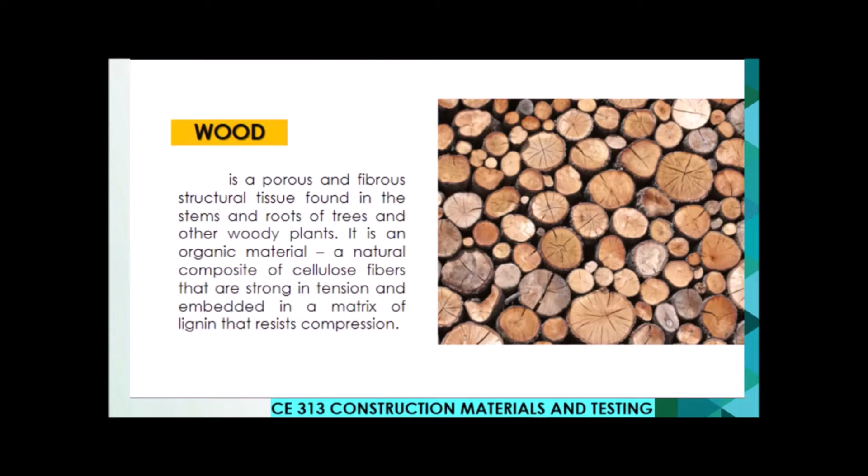So, para ma-visualize natin siya, dito class we have a figure. Ibig sabihin yung cellulose ay dito sa loob, okay? Yung lignin naman, itong outer part na to.

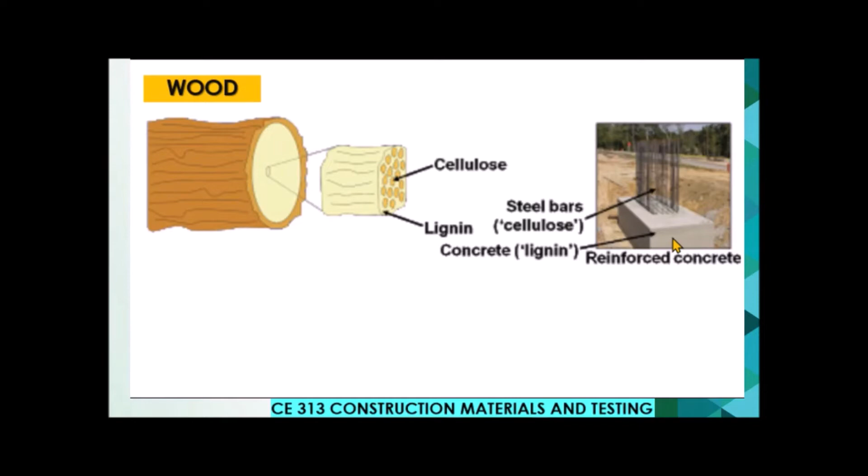So, para mas madali pa nating maintindihan, i-compare natin siya dito sa isang reinforced concrete. Ibig sabihin lang, class, yung ating cellulose, siya yung nagsisilbing steel bars, kung saan siya ay good for tension. Ngayon naman, itong lignin, siya naman yung concrete dito sa ating reinforced concrete, which is good naman sa compression.

Wood is one of the oldest known materials of construction, and skill in its use combined with the understanding of its nature have together produced many satisfactory solutions for structural and design problems throughout the ages.

So, alam naman natin, class, na noong unang panahon, wood lang yung ginagamit natin madalas sa construction. Kaya nga makikita natin noong unang panahon, made of wood lang yung kadalasang mga bahay.

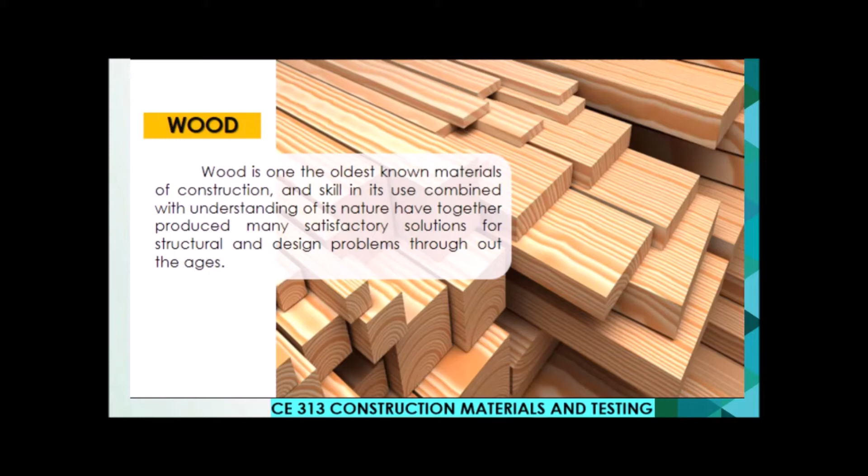In addition to its usefulness as a material for structural and applied design, because of its relative cheapness, wood has also fulfilled a role capacity of temporary structure, allowing materials such as concrete to be erected in structural forms, which would otherwise have been vulnerable in the stage before the binding medium gained strength.

So, ibig sabihin lang, class, nung temporary structure, tinatawag din natin yun na falsework. Yung falsework consists of temporary structure used in construction to support a permanent structure until its construction is sufficiently advanced to support itself.

So, siya natin, class, madalas nagagamit pag sinabing falsework. Siya yung mga pansuporta, halimbawa natin sa second floor, sa mga arcs, ganon.

At ang isa pang gamit nga ng wood is bilang forma. Ngayon kasi, class, meron na tayong mga steel tubes na ginagamit sa falsework. Pero kahit papano ngayon, may gumagamit pa rin, of course, ng wood.

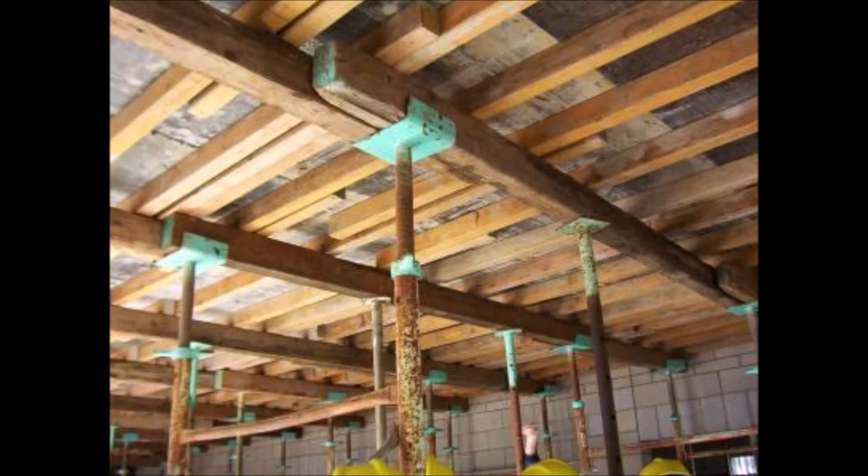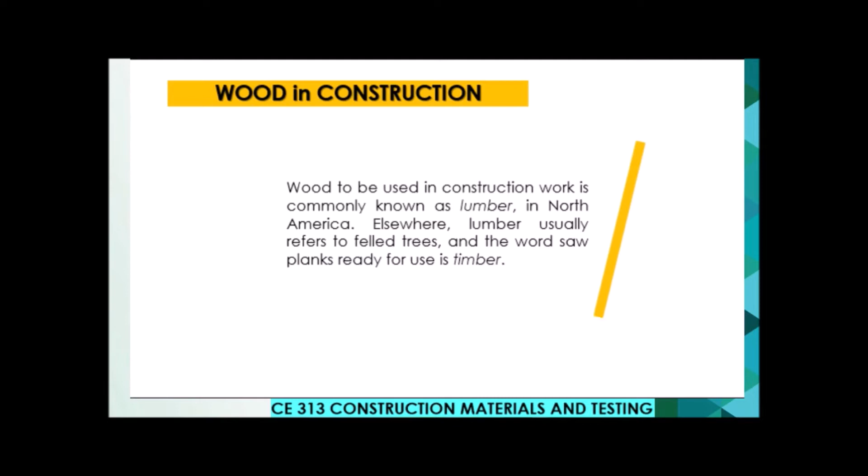So, wood in construction. Wood to be used in construction work is commonly known as lumber, in North America. Pero dito din naman sa ating class, alam din naman natin na basta sa construction, lumber. Kaya nga, di ba pag bumibili tayo, coco lumber, good lumber.

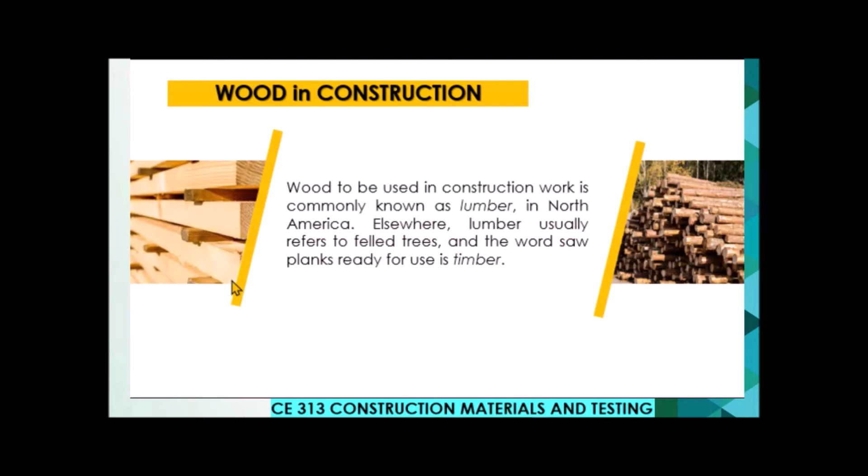Pinutol na puno. And the word for saw planks, ready for use, is timber. So, ito yung saw planks, ang tawag dyan is timber. So, pag nag-prepare kayo, timber lang pala. Hindi ko sure, pero meron kasing subject na timber design.

So, wood has been an important construction material since humans began building shelters and houses. Kagaya nga na sabi ko kanina, noong unang panahon, kadalasan lang din naman ng mga bahay is made out of wood. At sa ngayon, kahit medyo modern na tayo sa ating mga construction materials, meron naman tayong tinatawag na sustainable living, kung saan mas ginagamit pa rin nila talaga yung wood.

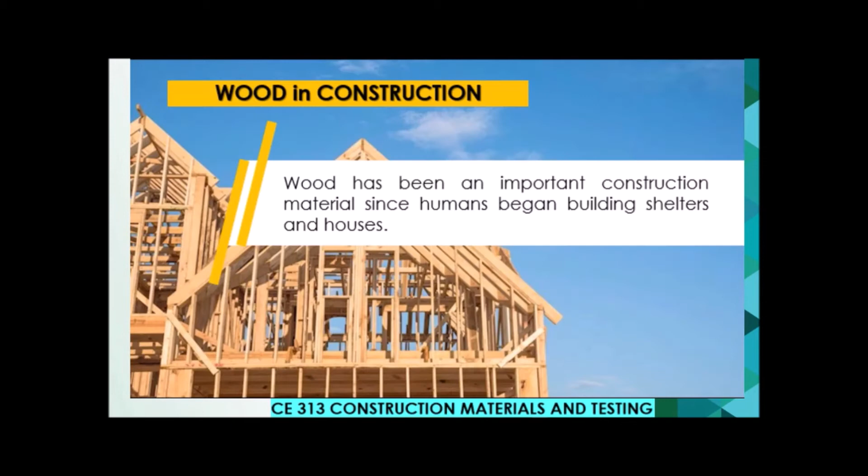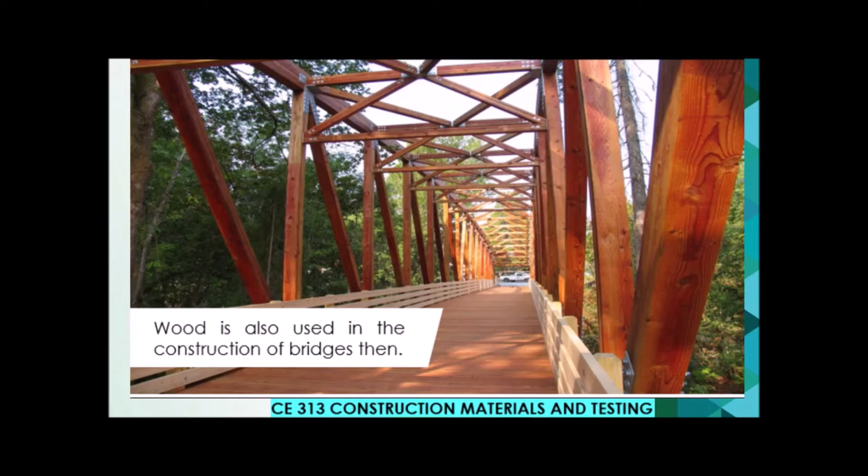And of course, sa panahon natin ngayon, nililimit din naman natin yung pagpuputol ng puno. Kaya mas madalas ginagamit na natin yung mga steel. Pero yung strength, na i-design din yan class. Kaya po pwede talagang gamitin yung wood for bridges.

Seasoning of wood. Seasoning is the process of drying timber to remove the bound moisture contained in the walls of the wood cells to produce seasoned timber. Seasoning can be achieved in a number of ways.

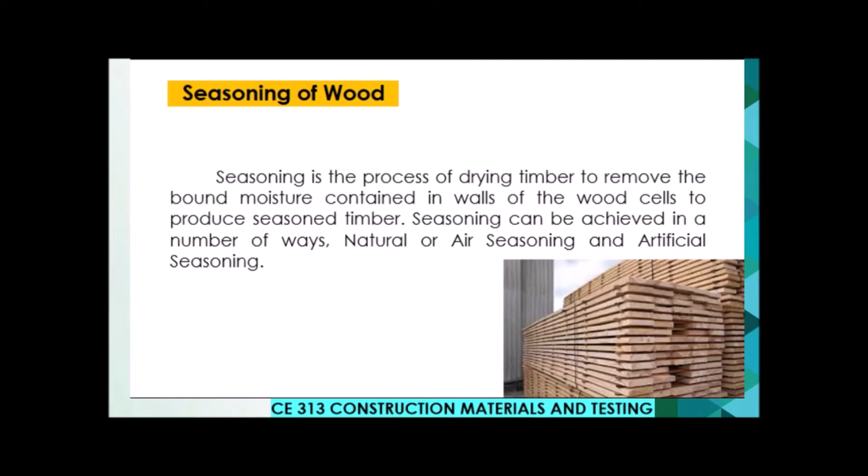So as we said, there are two ways to season wood: natural or air seasoning, and artificial seasoning.

So what is natural or air seasoning? Air seasoning is considered one of the best methods adopted in seasoning of lumber, although the period involved is relatively longer than the artificial seasoning method.

So how is natural or air seasoning done? Lumber is piled outdoor where its length is sloped at about 10% of its length. Lumber is piled in a well-ventilated shed. Each piece is properly and evenly spaced from each other for free circulation of the air around the lumber. The uniform spacing of the lumber between each other in a pile is arranged by using wooden or bamboo sticks inserted between each pieces of lumber.

The stick inserted between each piece of lumber not only serves as a spacer for free air circulation, but also prevents ants, worms, and various insects from living in between the lumber, subjecting the wood to attack.

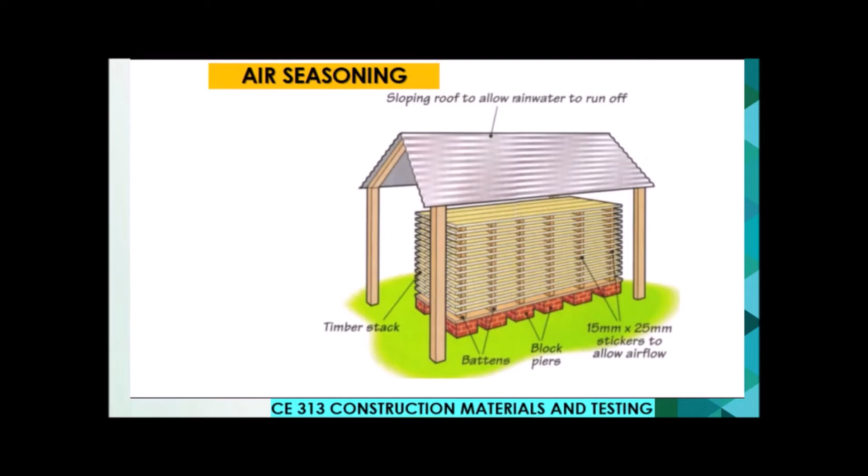Next is our artificial seasoning. Under this method, the lumber is stacked inside a drying kiln and then subjected to steam and hot air under pressure. Artificial seasoning is the process being adopted for quick drying of wood.

So this is faster. But wood which undergoes this process is considered quite inferior in quality as compared to those that are dried by the natural seasoning method.

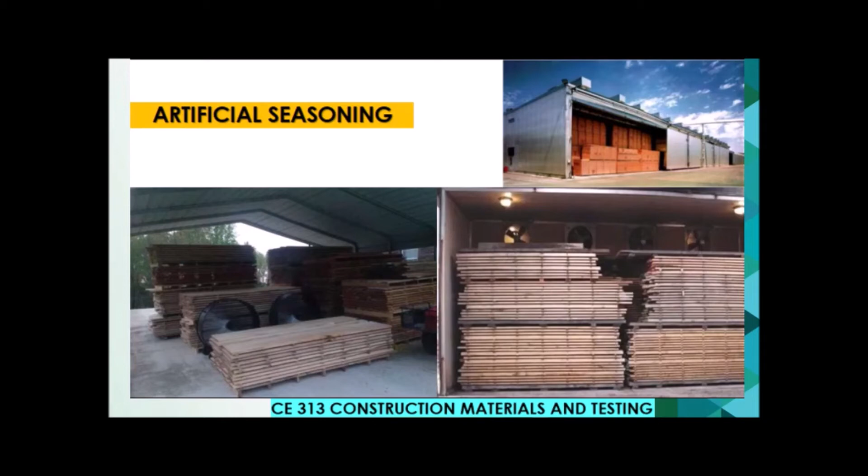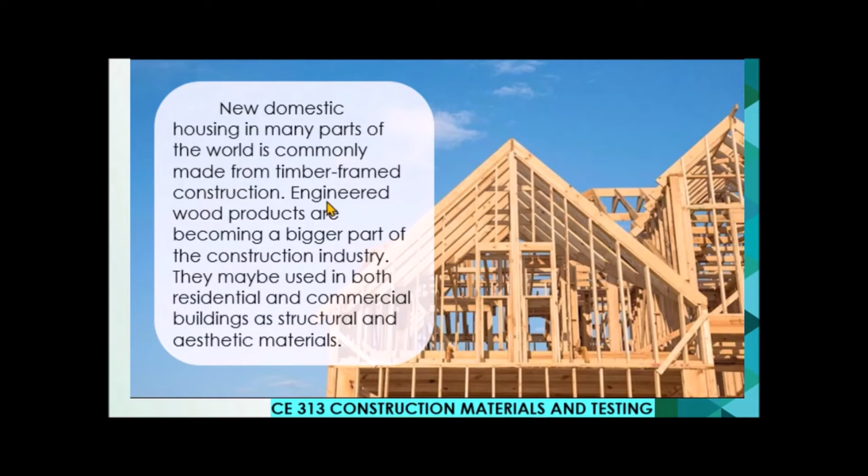New domestic housing in many parts of the world is commonly made from timber frame construction. Engineered wood products are becoming a bigger part of the construction industry. They may be used in both residential and commercial buildings as structural and aesthetic material. So here, we introduce what we call engineered wood.

Engineered wood is manufactured from scraps of lumber and byproducts such as sawdust that have been reformed using heat, glue, and pressure to make a usable solid wood alternative, in an effort to meet the demands for construction materials that are lower costing but equally durable.

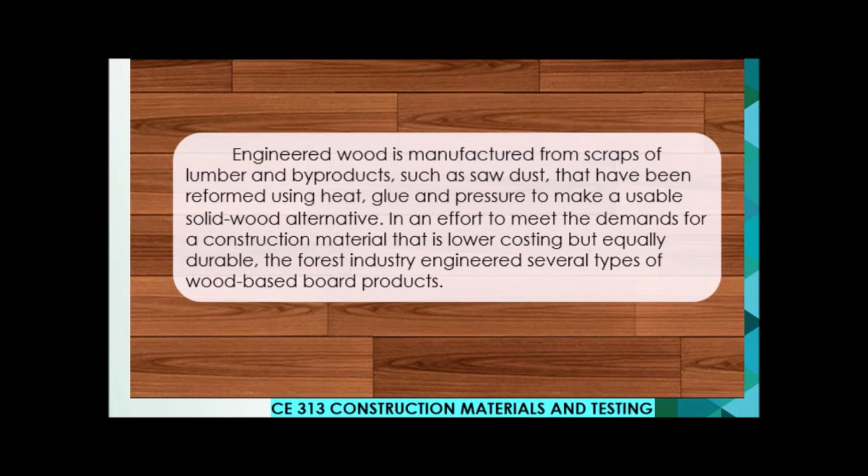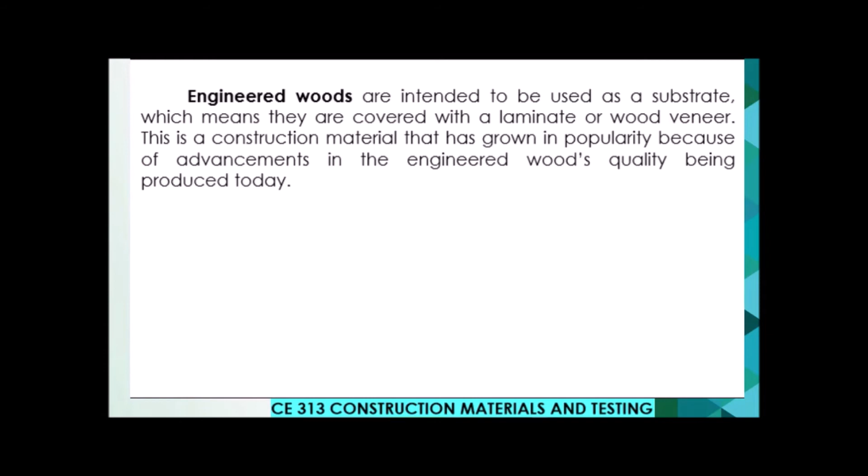Engineered woods are intended to be used as a substrate, which means they are covered with a laminate or wood veneer. This is a construction material that has grown in popularity because of advancements in the quality of engineered woods being produced today.

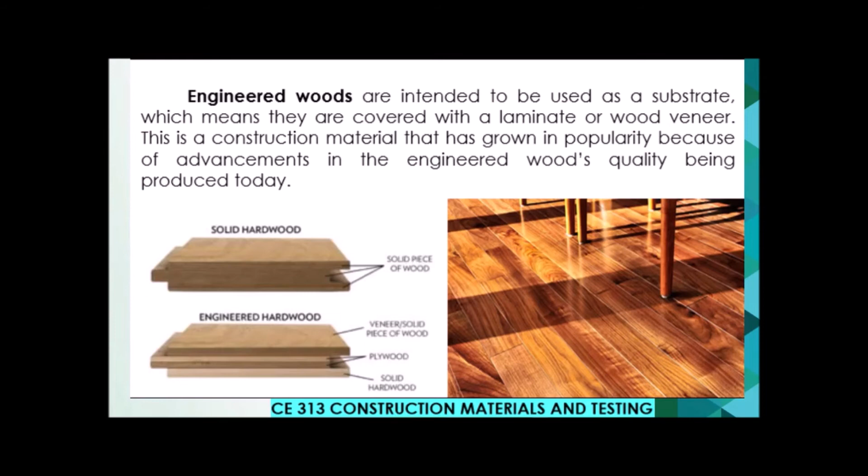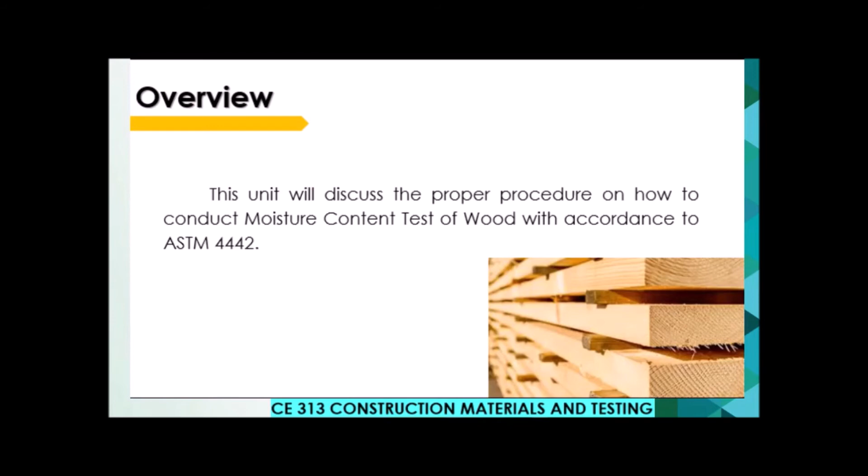Let's have our overview first. This unit will discuss the proper procedure on how to conduct the moisture content test of wood in accordance with ASTM D4442. The test includes testing objectives, scope, apparatus required, safety and precautions for materials, apparatus and equipment to be used, step-by-step test procedure, tabulation of data, calculation, and test results.

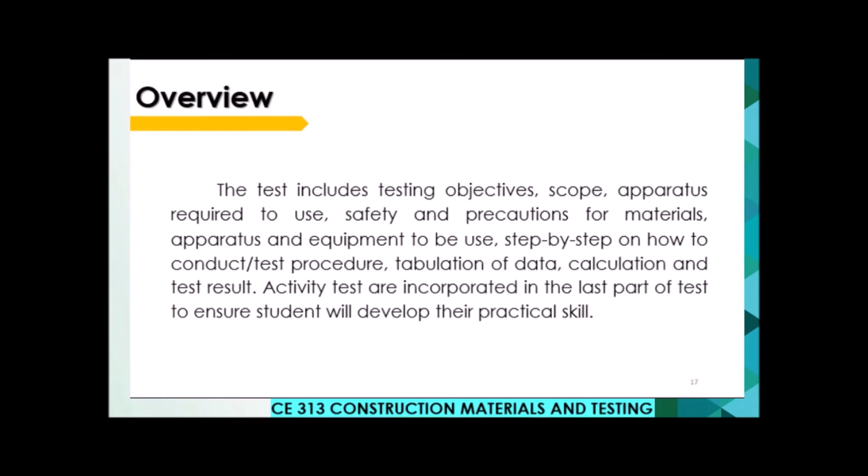Activity tests are incorporated in the last part to ensure students develop their practical skills. So once we finish discussing this, we will have an activity.

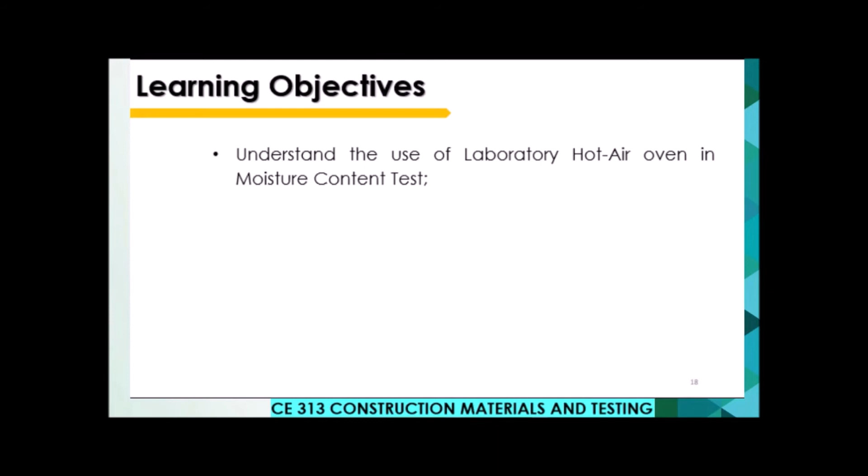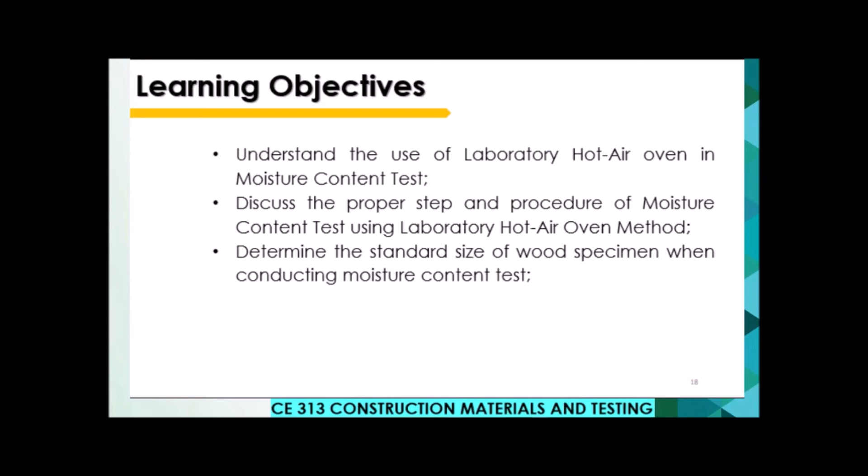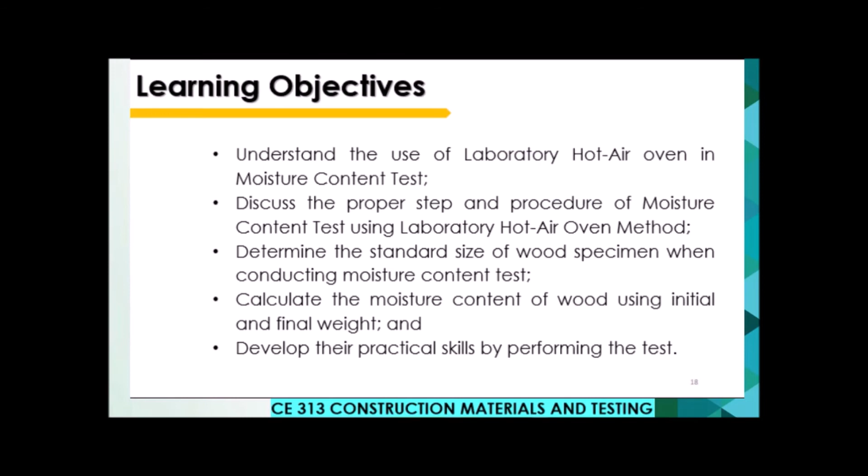What are the learning objectives under this unit? First is to understand the use of the laboratory hot air oven in moisture content testing. Next is to discuss the proper steps and procedure of the moisture content test using the laboratory hot air oven method, and determine the standard size of wood specimen when conducting the test. Next is to calculate the moisture content of wood using initial and final weight. Finally, to develop your practical skills by performing the test.

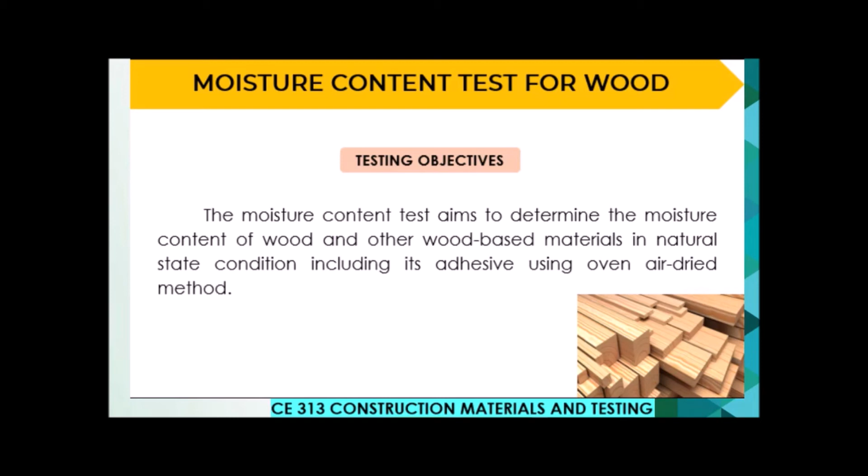So we have here the moisture content test for wood in accordance with ASTM D4442 using a laboratory hot air oven. What is our testing objective? The moisture content test aims to determine the moisture content of wood and other wood-based materials in their natural state condition, including adhesive, using the oven air-dried method.

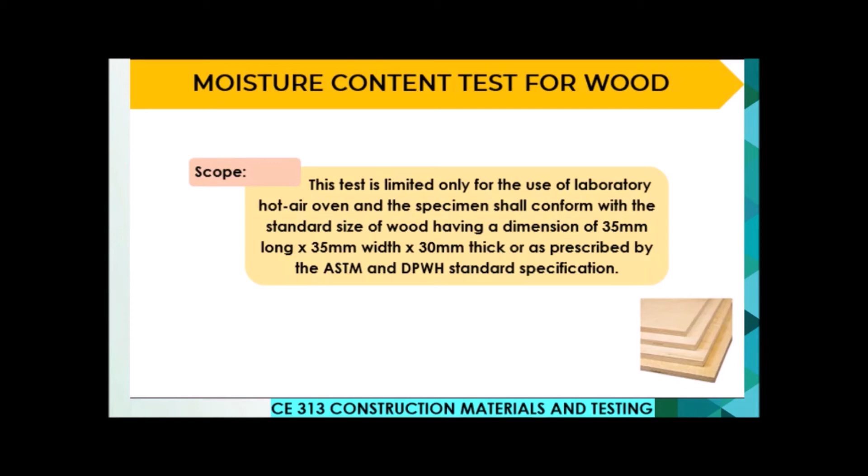What is the scope of this test? This test is limited only to the use of a laboratory hot air oven, and the specimen shall conform to the standard size of wood having a dimension of 35 mm long, 35 mm width, and 30 mm thick, or as prescribed by the ASTM and DPWH standard specification.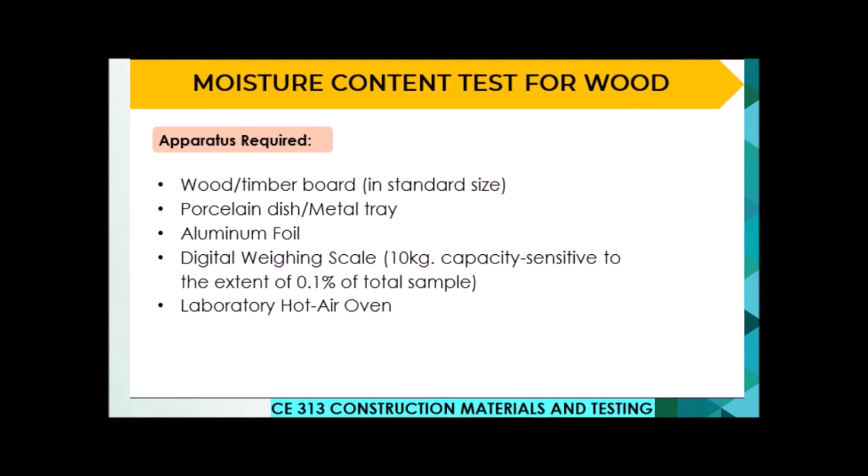What are the apparatus required for this test? First, of course, we need the wood timber board, which should be in the standard size stated earlier. We also need a porcelain dish or metal tray, aluminum foil, a digital weighing scale, and of course, a laboratory hot air oven.

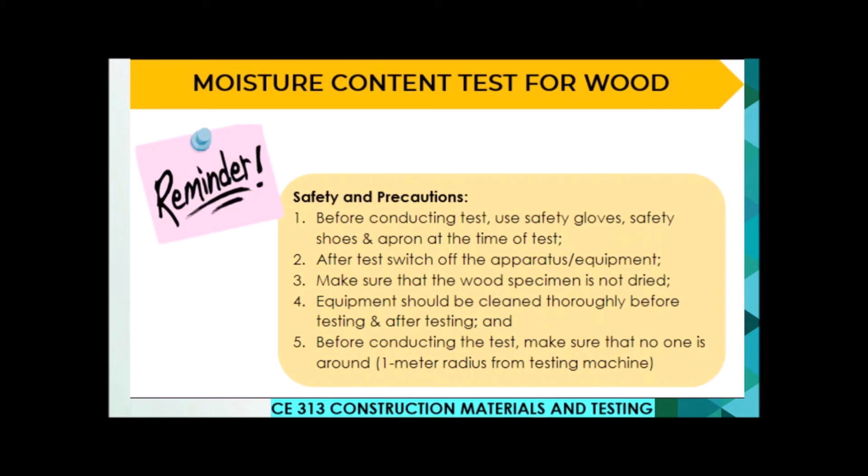Before we conduct the test, let's have some safety and precautions. Before conducting the test, use safety gloves, safety shoes, and an apron during the test. After the test, switch off the apparatus. Make sure the wood specimen is not dried out improperly. Equipment should be cleaned thoroughly before and after testing. Before conducting the test, make sure no one is within a 1 meter radius of the testing machine.

Test procedure: the following procedure was adopted to ensure that the data recorded in the moisture content test specimens was taken in an organized and consistent manner.

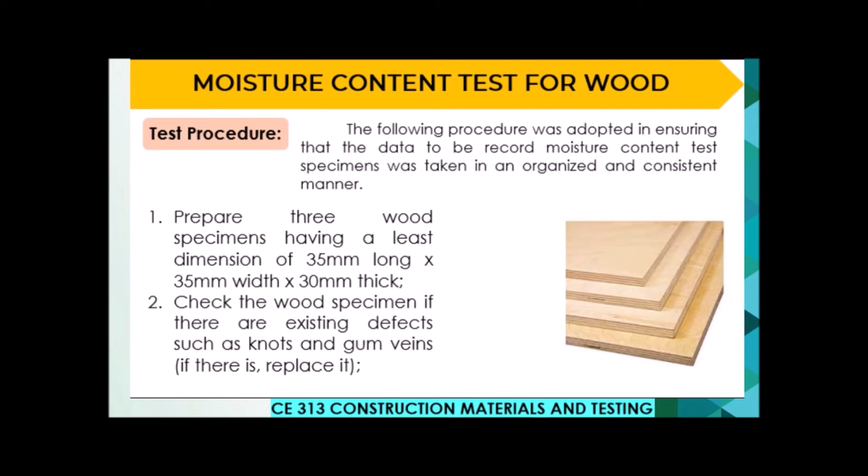First, prepare our specimen with the required size or dimension of 35 mm long, 35 mm width, and 30 mm thickness. Next, check the wood specimen for existing defects such as knots and gum veins. If there are any, replace the specimen. After checking the wood specimen, grab aluminum foil and wrap each wood specimen immediately.

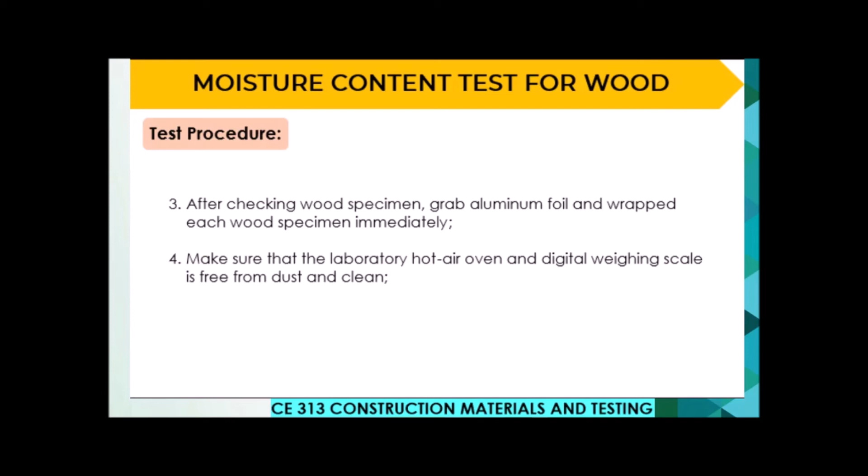Next, make sure that the laboratory hot air oven and digital weighing scale are free from dust and clean.

Get the wood specimen and weigh it individually. If one piece weighs less than 50 grams, cut one, two, or more adjacent test pieces and weigh them together to make sure that the initial weight is more than 50 grams. So the initial weight should be 50 grams.

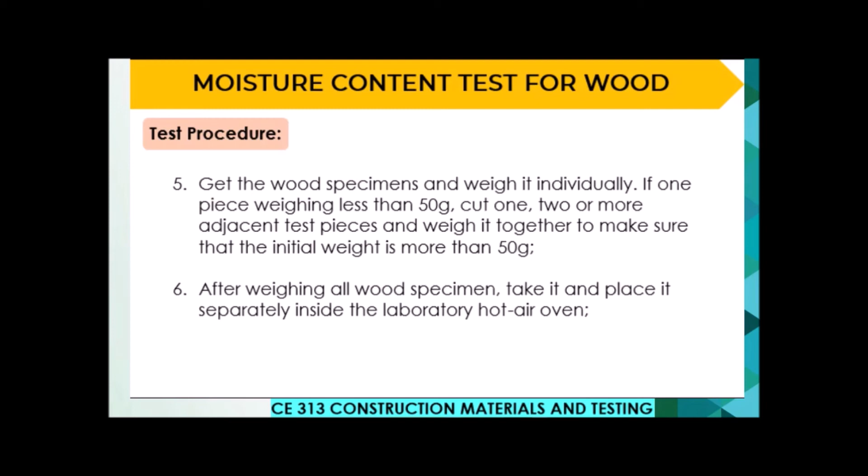After weighing all wood specimens, take them and place them separately inside the laboratory hot air oven. Set up the temperature of the laboratory hot air oven at 110 degrees Celsius plus or minus 5 degrees Celsius for at least 18 hours but not to exceed 24 hours.

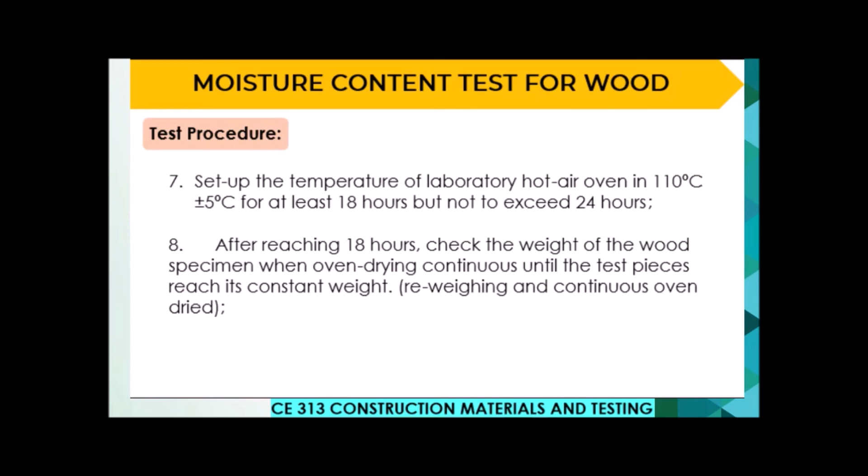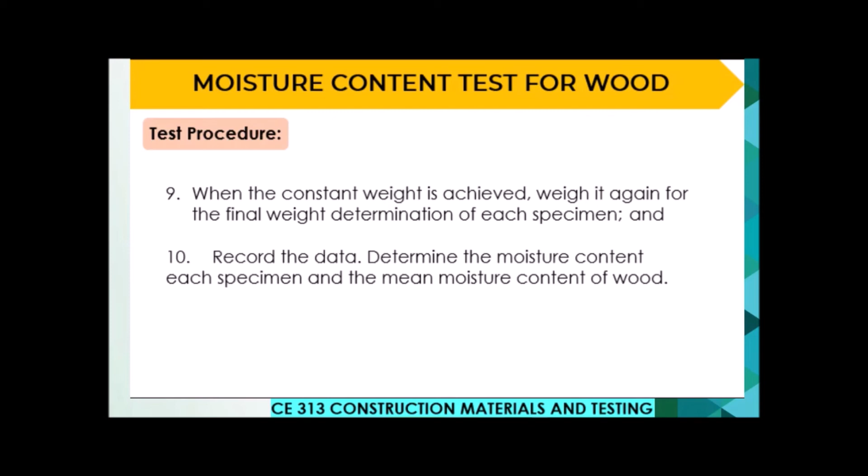So when the constant weight is achieved, weigh it again for the final weight determination of each specimen. And record the data. Determine the moisture content of each specimen and the mean moisture content of the wood.

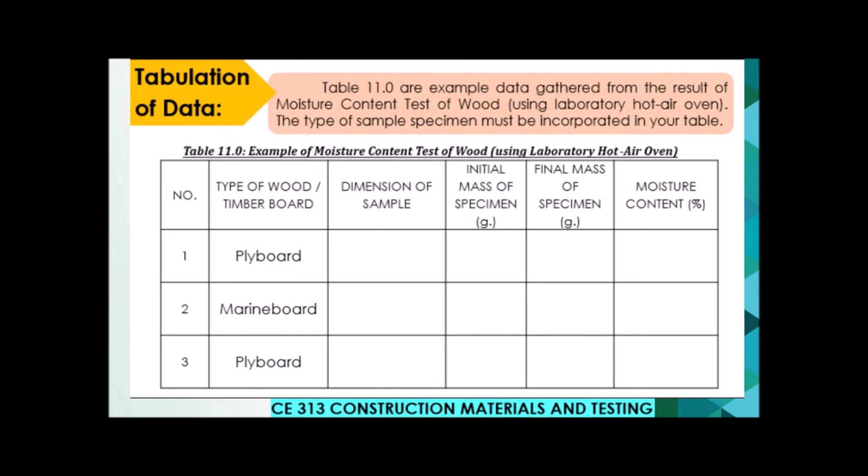And then we compute our moisture content. The dimension of the sample specimen must be incorporated in your table. So here is the dimension of our specimen.

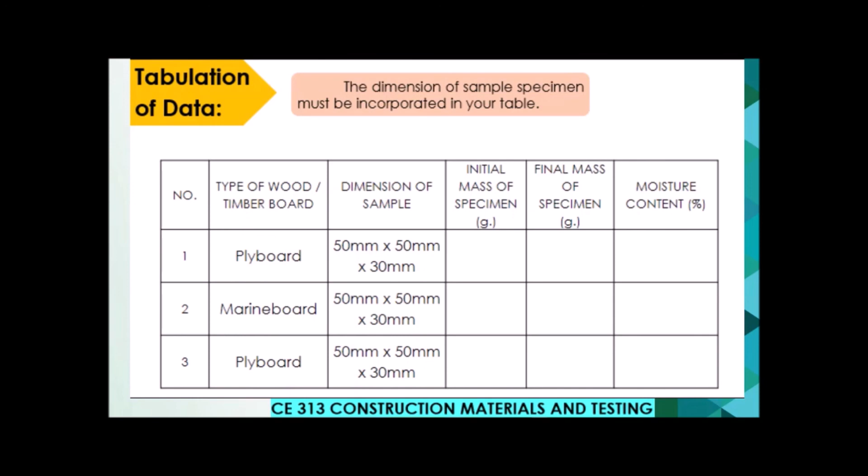Okay, so next, to be able to determine the moisture content of wood, you need to consider the original or initial weight, initial mass of the given sample.

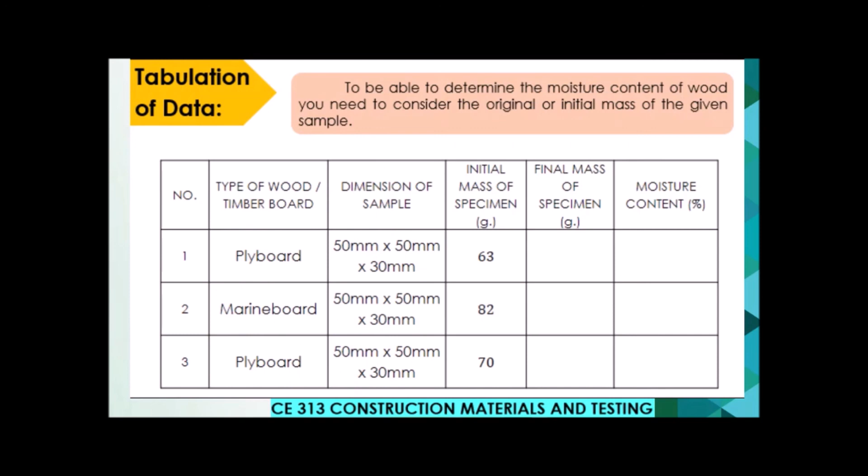Okay, so in addition, we also need the final mass of the given sample. This is the mass after it is placed in the laboratory hot air oven. So for sample number 1, from 63 grams, its final mass became only 57 grams.

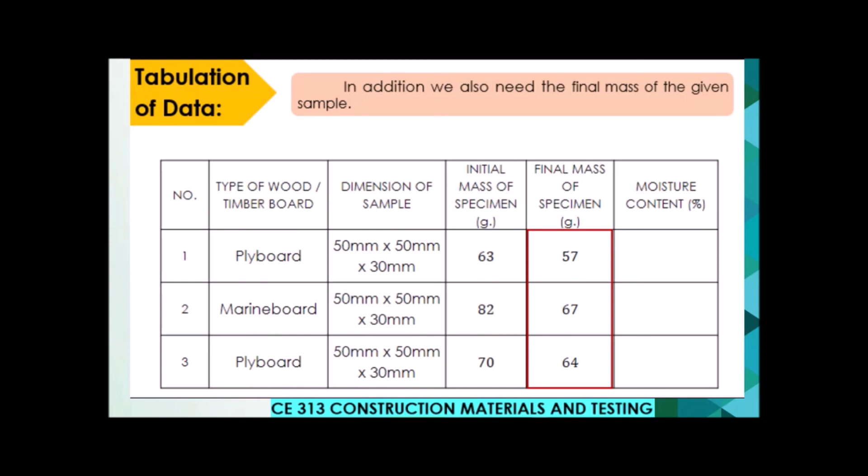For sample number 2, the marine board, from 82 grams, it became only 67 grams. For sample number 3, plyboard, from its mass of 70 grams, it became only 64 grams. So now, let's determine the value of the moisture content of the wood.

So how do we determine the moisture content of wood in percent? It's the initial mass minus the final mass of our specimen, divided by the final mass of the specimen, multiplied by 100. So for sample number 1, we just do:

63 minus 57, divided by 57, multiplied by 100, so we have 10.53%. For sample number 2: 82 minus 67, divided by 67, multiplied by 100, so we have 22.39%. For sample number 3: 70 minus 64, divided by 64, multiplied by 100, so we have 9.38%.